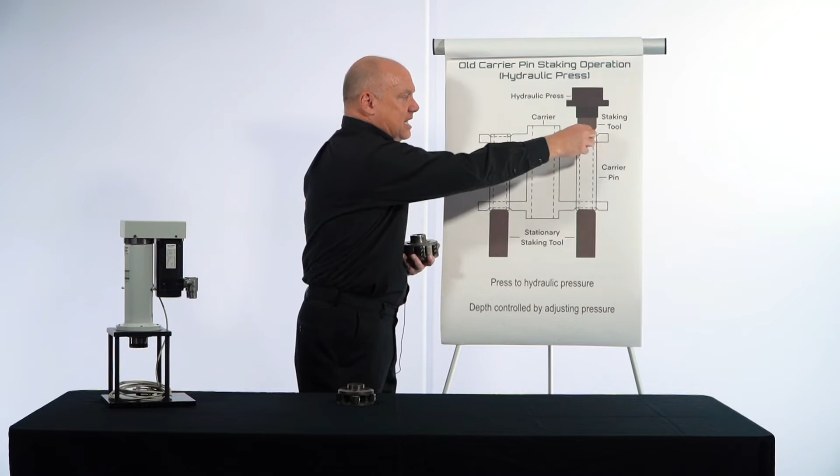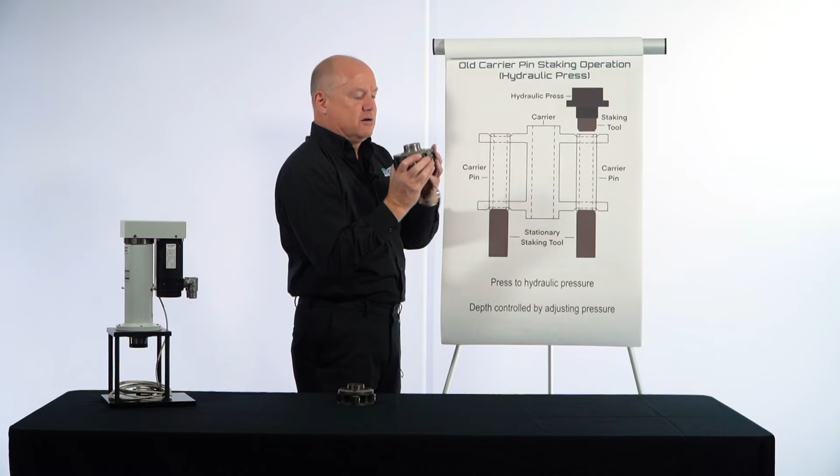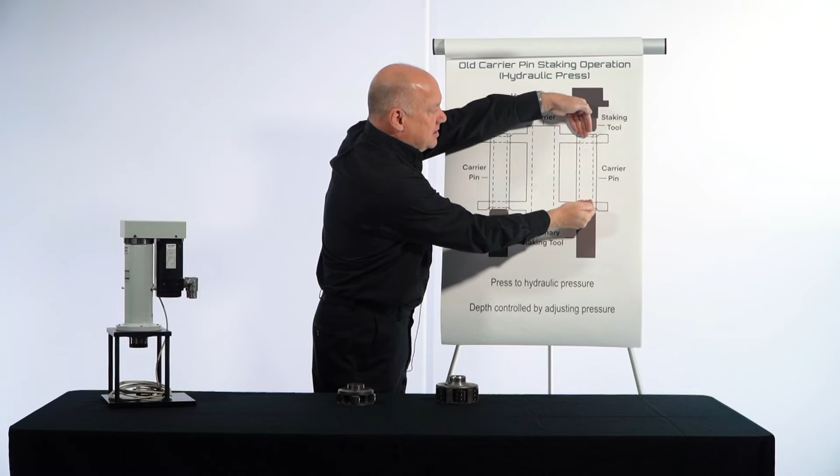So let's talk a little bit about how this is done in the past. The typical way to do the staking is you set this part down and it actually sets on the bottom tools—the housing isn't supported at all. These pinion shafts, or pinion pins, are pressed in. The part is set on the tooling where the bottom staking tools are holding on the pins and supporting it. Then a hydraulic press with a staking tool comes in from the top and basically pinches or crunches these two together, and it's done usually to a force. It can be done to a dead stop on the tooling, but normally they just have the hydraulic pressure set to 8,000 or 9,000 pounds, whatever it needs to be, and it comes down and presses to a force. That's the standard way of doing it.

So basically you're pressing, you're hoping your tooling is good, you're hoping your pinion shafts are of the proper hardness, so that if I put a certain amount of force on it, I'm going to get a certain amount of material flow and a certain amount of stake.

Well, the technique we have used in order to improve that is using a Promess servo press with the tooling, same as with the hydraulics. The difference is the tooling on the bottom is the same, but you have a platform here that supports the housing, and the press has springs that push this part up and hold it off of the tooling. So you're not touching the tooling at this point, and we're not touching the tooling at that point—these springs are holding it up.

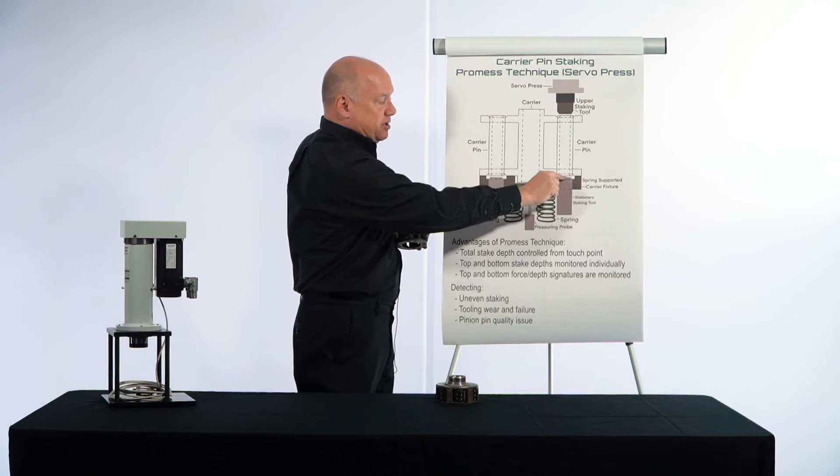We put a measuring probe that measures the height of this plate, or this platform, that's holding the housing. So now when the press comes in and presses to do the staking, it pushes those springs down until you make contact with this tool. And when we press this down, because we have the load cell here, we press until it makes contact with the tool, and we can feel that it made contact because of the load cell off of the press—once the housing is pushed down and these come together, maybe we'll set a limit at 100 or 200 pounds so we can feel when those two touch. Now we know the tooling has made contact.

The goal is to get a half millimeter stake depth on top and a half on the bottom, so that means the press has to move 1 millimeter. And if everything is perfect, the pinion pin has the same hardness, so the material flows the same on top and bottom, and the tooling has a similar geometry.

And if the press moves 1 millimeter, I'm going to get a 1/2 millimeter of stake on the top and a 1/2 millimeter of stake on the bottom. Now we don't take that on faith, but the press moves 1 millimeter after the touch point. So it comes down, finds the touch point, presses 1 millimeter, and then comes back up. Very simple application. The part spins, we hit the next one, part spins, it hits the next one, and so on.

What we end up doing with the advantage of this is the total stake depth is controlled from the touch point. So we know that we've come in and we hit and we move 1 millimeter, which will be a 1/2 millimeter per top and 1/2 millimeter per bottom of stake. The top and bottom stake depths are monitored individually, and I'll explain how we do that. The top and bottom force depth signatures, so we do signature analysis, that's measured individually, and I'll explain how we do that.

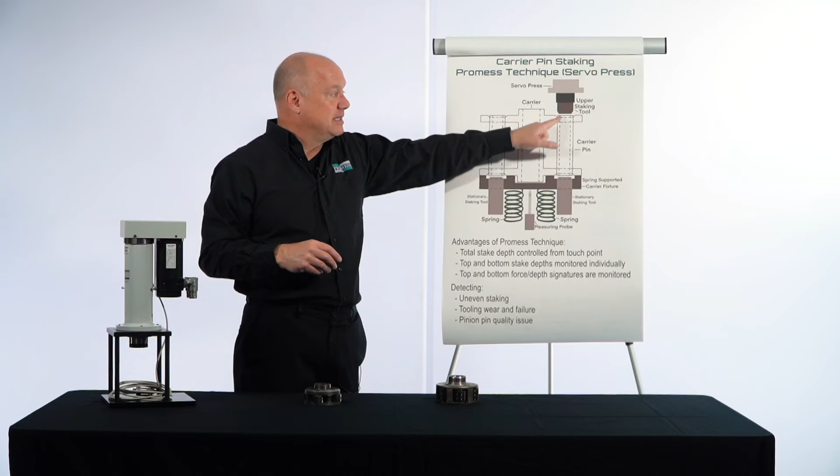We can detect uneven staking, total tooling wear and failure. If your tooling top or bottom is wearing or is broken, has a chip or something, you'll get a different kind of flow, a different kind of force. You'll see that. And the pinion pin quality. Sometimes these pinion pins, because they're hardened, but the top and bottom of the pin is not hardened because you need that material to flow. And sometimes if they're not hardened properly, the system will tell you that.

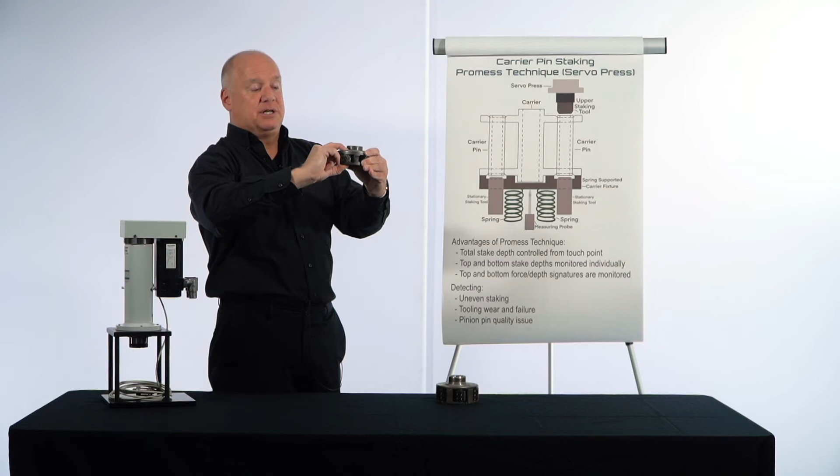So basically, the housing is supported on a spring-loaded platform. The tooling to stake the bottom is located below the pin. The press comes down, hits the pin, pushes it down until it captures it between the upper and lower tooling. The press can feel that it's captured because the force starts to climb. It grabs that position point and then presses a distance from there. So we're controlling that. So that's how the motion is controlled.

The cool thing and interesting thing is how the monitoring is done. The raw information which is captured, we have an encoder and we have a load cell. So as the press is moving down, it hits the part. When it hits, the force jumps and then it moves 1 millimeter. And so you have this curve, and that is the raw information off of the press.

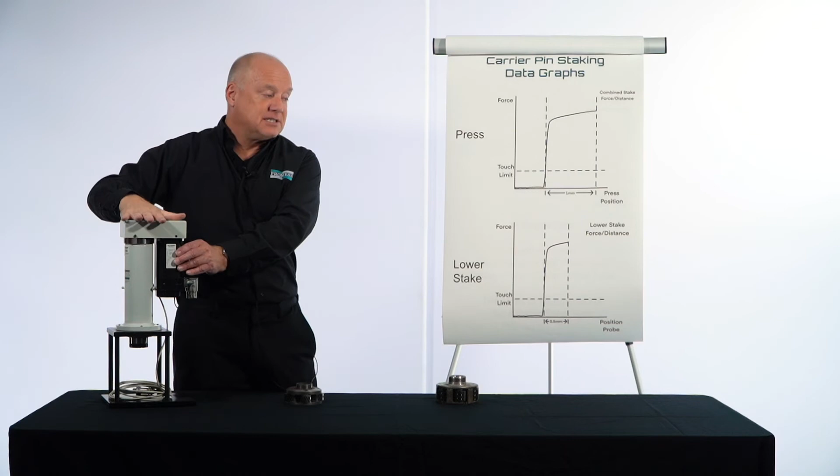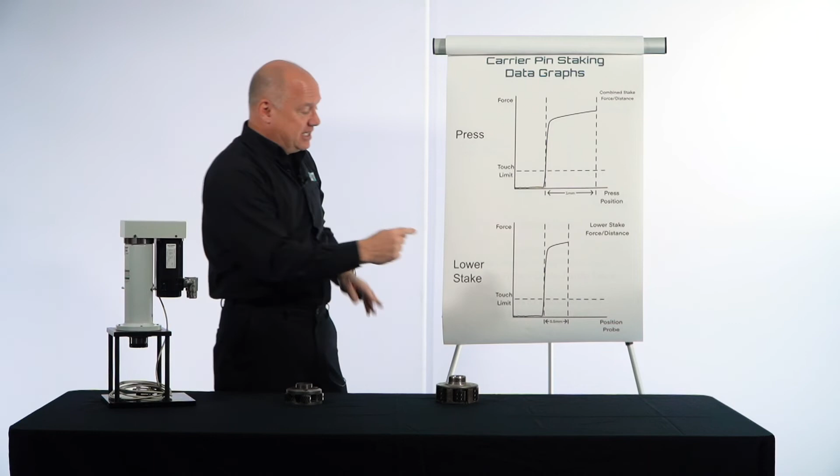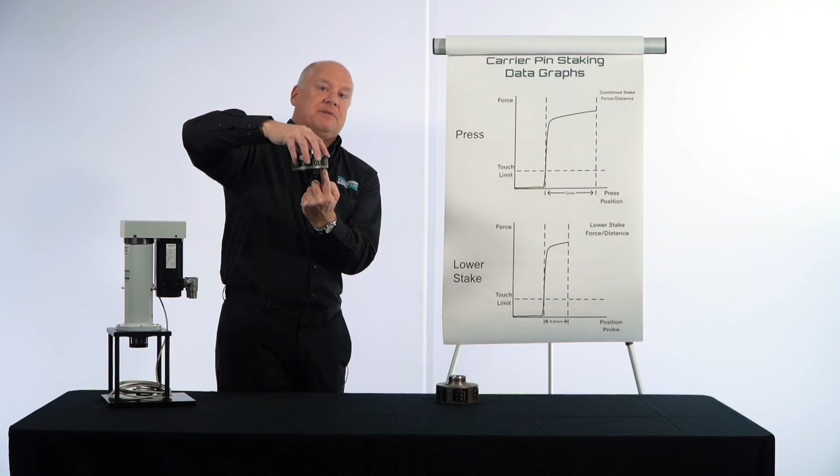Now we also have the probe on the bottom of the platform, measuring where the platform's at. So we take second raw information, which is really telling me what's going on in the bottom stake. That's 100% what's going on in the bottom stake, because when it comes in, you get the touch point. So I have my probe down here and my force up here. So it's the force off the load cell, but the position off the probe. When it touches, it comes down, and whatever amount that this platform moves is the staking depth of the bottom stake.

So the bottom stake is very clear what's going on. I can see the force curve. I can see, did I really go a 1/2 millimeter, or was the part too hard and this only went 1/4 millimeter and the top went 3/4 millimeter, or vice versa. So that information is really clear.

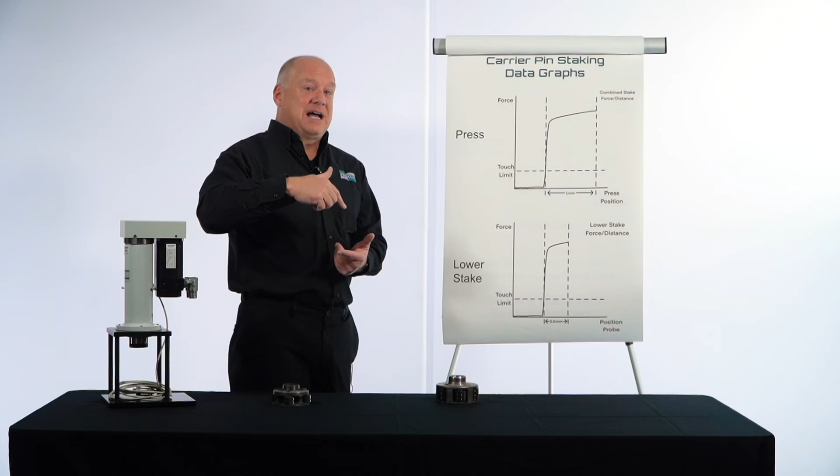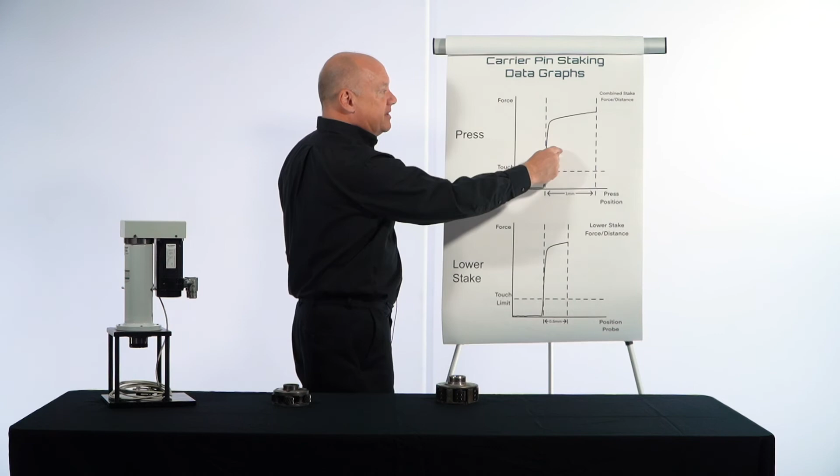But how do I know what happened on the top stroke, on the top stake? If this is my total and this is what happened on the bottom, I can subtract this curve from this curve, and it gives me very detailed information what happened on top.

And that's basically—this thick paper doesn't want to bend.

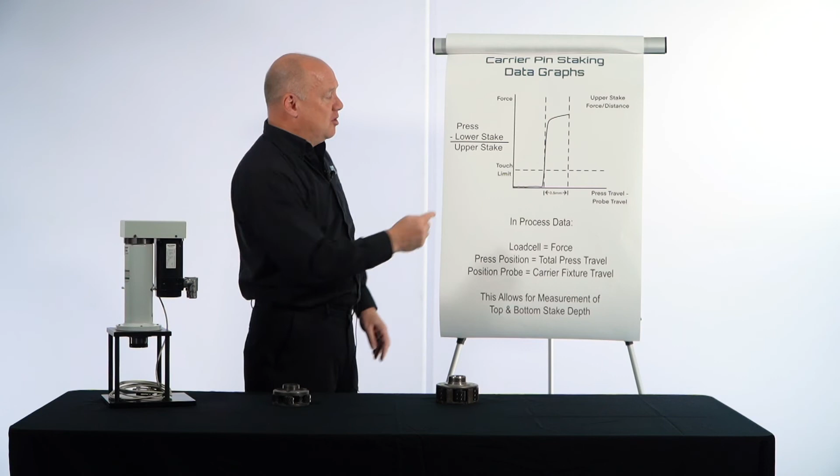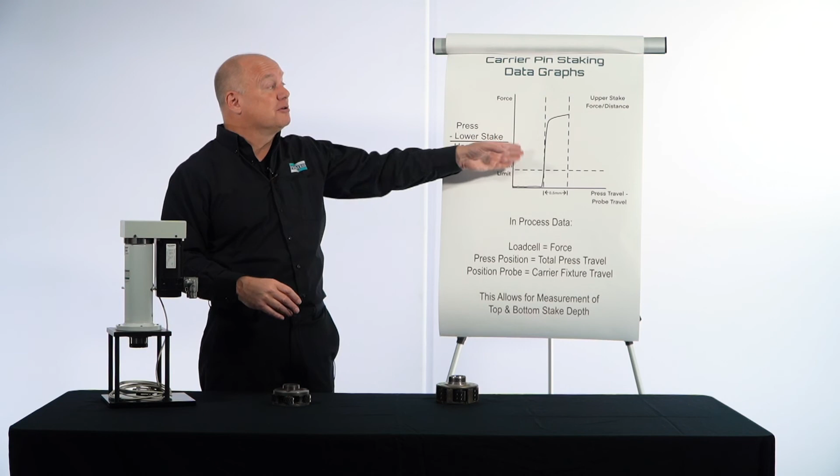So we get the exact same curve if we take the press information, the total information, minus the lower stake, which is the force off of that probe, that gives me my upper stake. I get a curve, which is the total curve minus the bottom curve, gives me the information for the top curve. And this is 100% isolating the information from the top. So I can say what was the depth and what did the curve look like. And with that, I can detect.

Again, it really tells you everything you need to know about the quality of the stake. What was the depth of the stake, top and bottom? What was the symmetry from top and bottom? Do I have a problem with tooling? Do I have a problem with parts? So there's a ton of information there.

And this was kind of a cool application. We did it the first time probably 12 years or more ago, and have done it many, many times since then, the same application. On this carrier, it's a good example. But anytime you're doing top or bottom stake, this is a very common thing for people to stake two sides by having a stationary tool and a moving tool.

This technique works. So if you have any questions on this, if you have an application, a staking or crimping application or a press fit application, that is what Promess does. We're experts at it. We sell a whole variety of presses, from this—again, this is a 3 kN press, around 600 pounds. We have applications that go up to 400,000 pounds with fully electric servo presses.